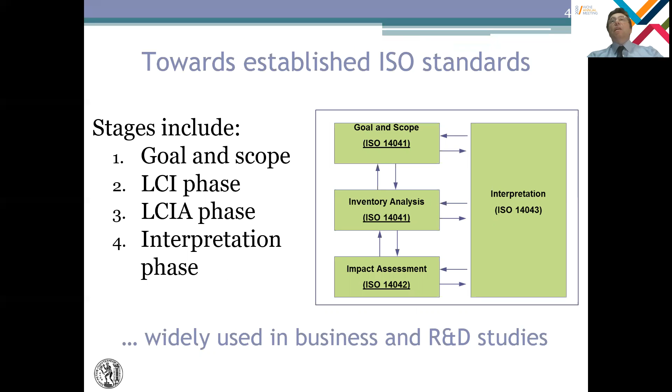Now, LCA is running for almost 30 years, and has been produced not within chemical engineering, but chemical engineering definitely has quickly embraced LCA and now it is part of our routine calculations for designs and case studies. It is essentially an ISO that has four rigid and clearly defined stages that include the goals, the description of the boundaries, the calculation of the inventories, and the development of analytics.

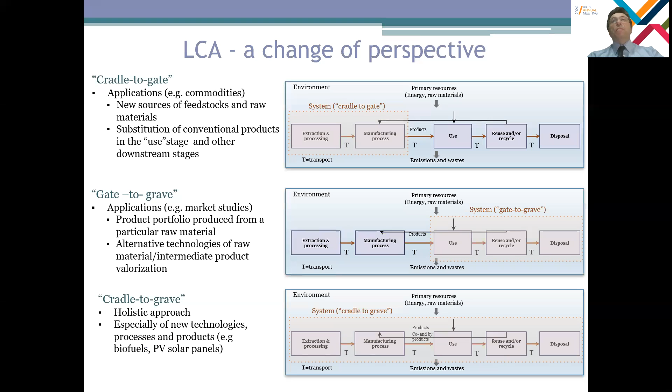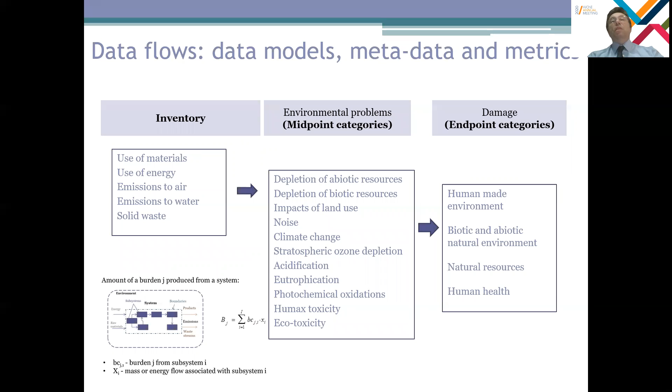LCA has definitely also expanded our perspective, from the previous esoteric analysis of the process into one that considers both upstream and downstream process, what we would consider a holistic approach. Also, LCA is involving a lot of data: background data with respect to the products, the process, the reactions; foreground data, which relate our decisions to ways to implement our idea into a process; and output data, which is the performance related data, all the different type of metrics, midpoint, endpoint categories, and so on.

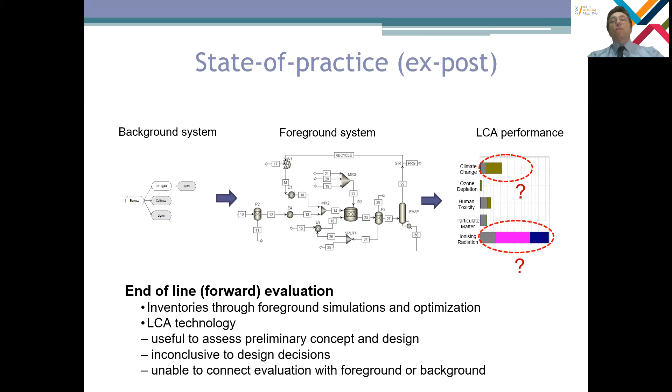So what we have today, the ex-post type of LCA, is data flows that are shown here from the left to the right, which include the background data that are converted to foreground data and then eventually give rise to life cycle inventories and life cycle analytics. Again, we want to get quickly through the foreground kind of evaluations and much more to make use of our degrees of freedom to get to better LCA performance, not just wonder how we're gonna improve things that we have produced.

So what we need is support as to the overall development of the background data, so the means, in other words, to go through the foreground calculations quickly and also make good use of the degrees of freedom so that we get to better results. So what we need is actually advice at early stages of development, so advice in advance. So advance is exactly what Ex-Ante stands for, but in advance for what?

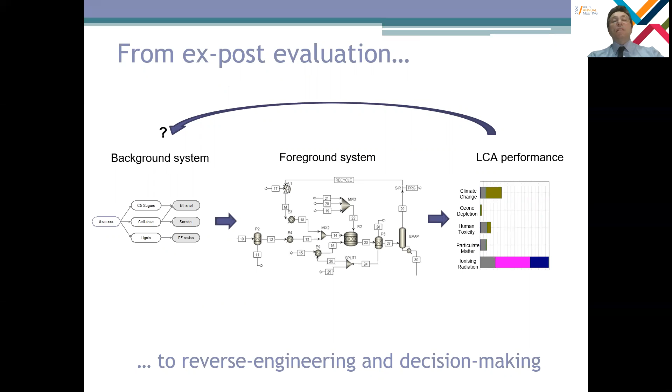So going back to the data structures, for the ex-post calculations, what we need to know is means to possibly change our flowchart with better processes, with better means to integrate, with different alternative supplies, if you wish, even to change our initial idea into an alternative idea. So the ex-ante promise has to be able to exclude technologies ahead of design, build functions that identify good supplies from bad supplies, and means to target appropriate products and product portfolios early on.

So from a viewpoint of data flows that we started from, again, input comes from the background data, the output is the LCI, and the foreground is the in-between stages, if you use the system that translates the input from the left to output on the right. And this system takes time to deliver, and this system could be parameterized to deliver with respect to the degrees of freedom which are available for us to manipulate.

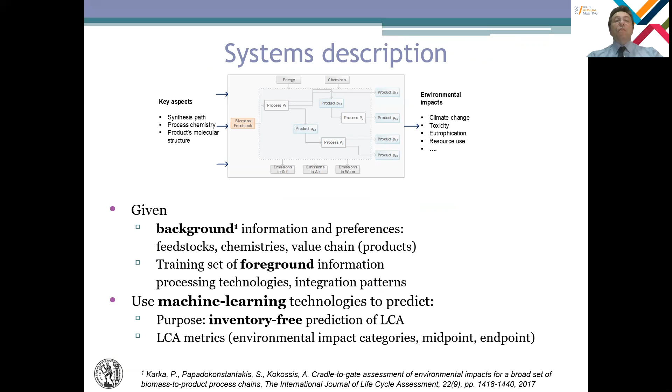So the basic idea is to use foreground data in order to develop a data model that could replace or convert the conventional connection between input and output from the flowcharts that we conventionally use through a data model that could be in the form of a decision tree or an artificial neural network. And apparently we will use machine learning in order to develop these models. So from a systems perspective, what we are given is data sets of background and foreground data, a set of KPIs, and we want to develop an inventory-free model using machine learning technology.

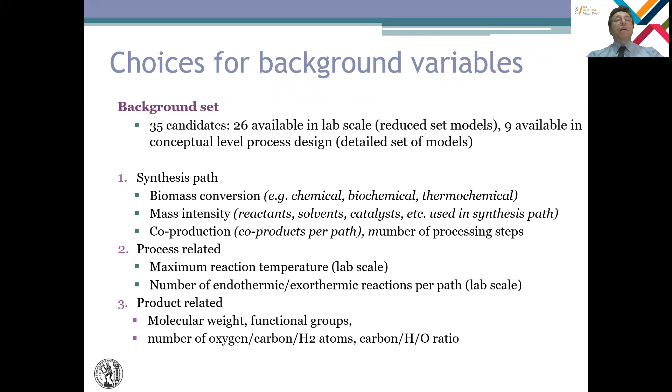I will start with the presentation of the input-output-based data structure that includes choices for background data that relate to reaction paths and chemicals, products, product portfolios, and different types of processes. We have sets of data that for each product will originate alternative supplies. So in this case, from glucose, we have supplies from wood chips or wheat straw, and many more. We have sets of data for each supply to address options to produce different products. So in this case, from biomass, we produce methanol, ammonia, ethanol, and many more.

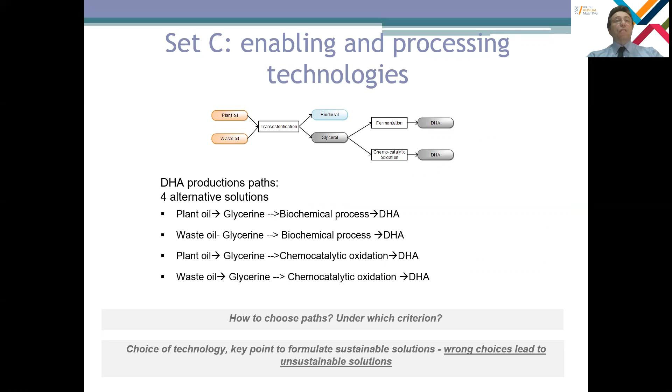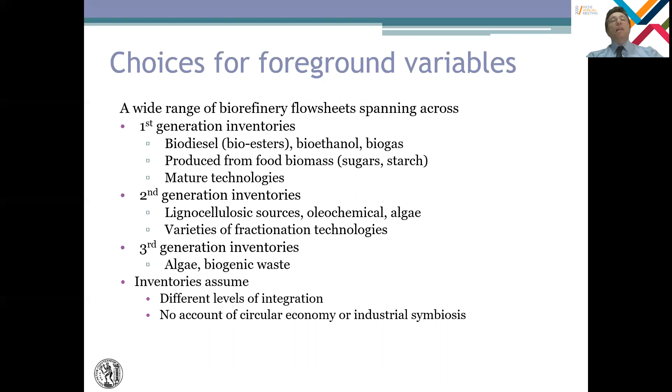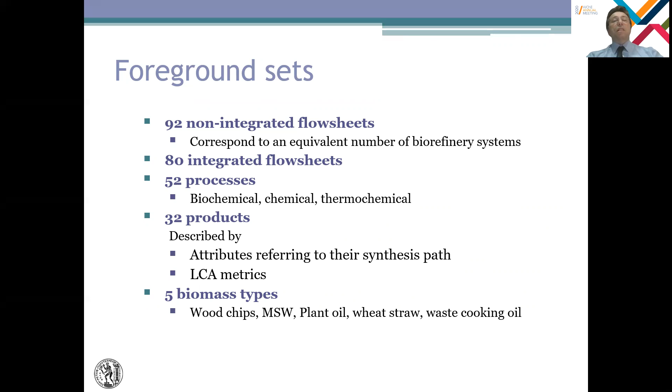And we have another set of data to connect supplies and products to different technologies through, in this example, biochemical or thermochemical routes. And the choices for foreground variables include all different types of generations, first, second, third, fourth generation biorefineries, from more mature technologies like biodiesel, bioethanol, biogas production, down to more emerging ones like the algal biorefineries and waste biorefineries. In terms of numbers, the foreground sets that we have used in this study include 92 non-integrated flowsheets and 80 integrated flowsheets, overall 52 processes, 32 products, and 5 different types of biomass.

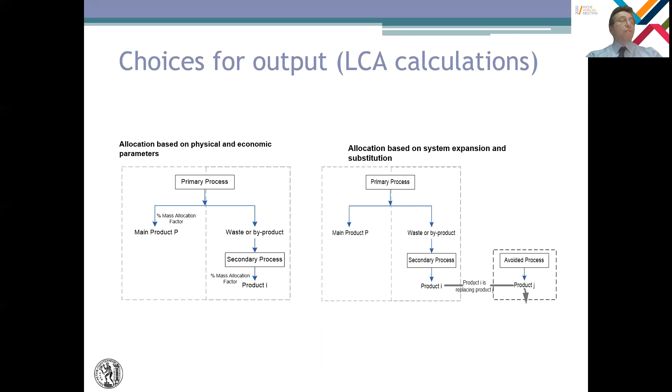Multiplying all these, we have 3 different options for calculating the allocation, either based on physical and economic parameters or based on system expansion and substitution. Overall, the output of the system accounts for 138 different KPIs, which include the 23 LCA metrics, namely the midpoint impact categories, the endpoint damage categories, 2 different total score metrics, and all this multiplied by the 3 allocation methods that I explained before, and 2 sets of independent variables for fully reduced kind of systems.

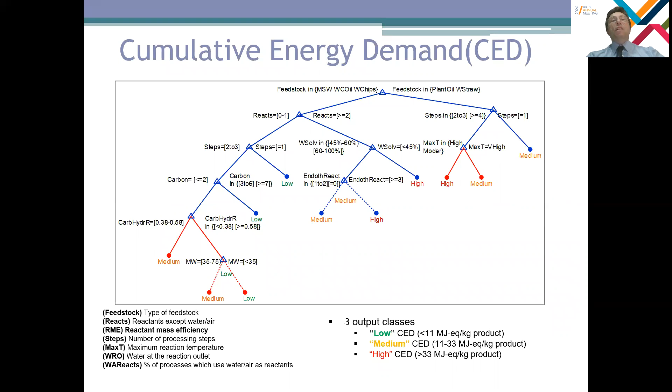We have verified the joint importance of both process-related and product-related functions in the models. Examples of trees are shown here with respect to climate change, with respect to CED, the cumulative energy demand, with respect to human health. And again, these kinds of trees are developed for all these different indicators that I explained before. And as far as the artificial neural networks are concerned, they generally worked well for the majority of the metrics. Still, for some of the indicators, the performance has not been the best, and there is room to improve this part in the future.

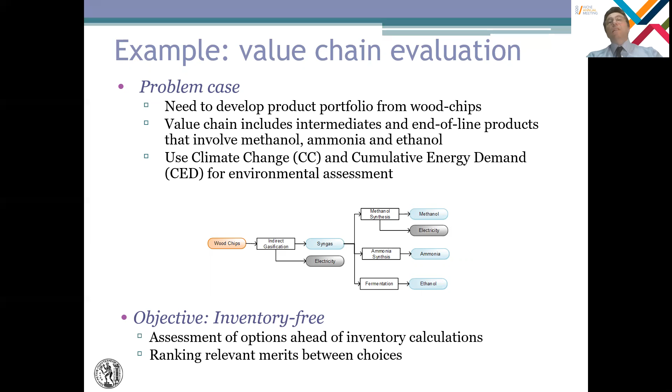We have two different metrics, the climate change and the cumulative energy demand. We have wood chips as the raw material. So again, the idea is which one of these products is better, and all that, without the need to do any simulations. So to do that for each product, for each feedstock, for each technology, we need to rely on the decision tree. We pick up the numbers there, and then the results are summarized in the tables.

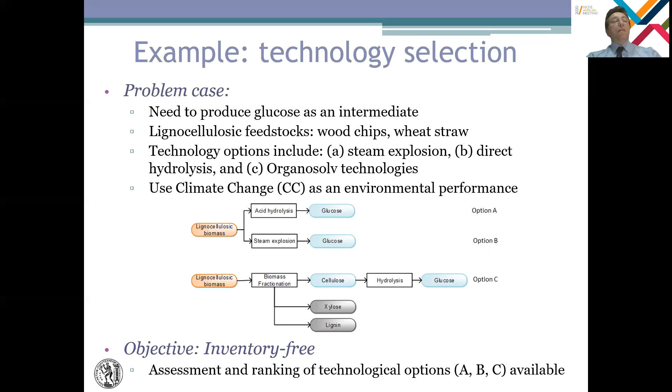In the second example, the purpose is to identify the right technology to convert lignocellulosic biomass into glucose. Options include steam explosion, direct hydrolysis, and organosolv technologies. We pick climate change as the metric to choose. Again, decision trees. Again, for each feedstock, product, technology, we have to apply the tree.

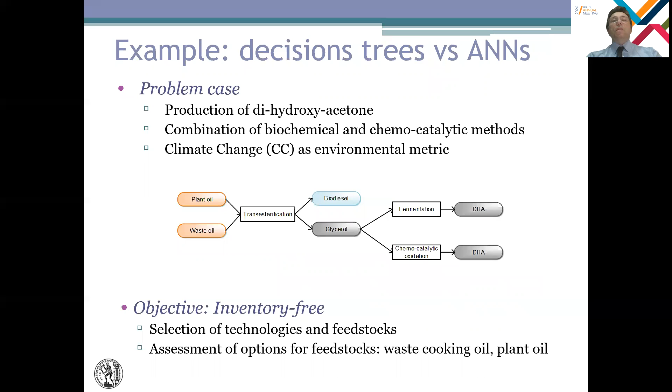In the third example, again, we address technologies for a non-conventional product, dihydroxyacetone, that comes from plant oil or waste oil. We use climate change again as an environmental metric, and essentially we have to evaluate ahead of design calculations four different paths, these paths that we show here.

Now, if one uses artificial neural networks on top of that, we'll be able to identify the single better solution, the last solution, as the greener one, and definitely pick up the right one. So a combined use of artificial neural networks with decision trees is what will give you the better result in this case.

Now, although the work is at very early stages, the results are not so bad, I would say, and more data will make the models more reliable, especially with the joint use of decision trees and artificial networks, to double check for consistency.

This kind of work has actually whetted our appetite. We have already extended the application into consumer products, believe it or not. This is joint work with Whirlpool and an Italian group. So what we target now is electrical appliances. Yes, it's a different problem. And we want to identify the better materials to use.

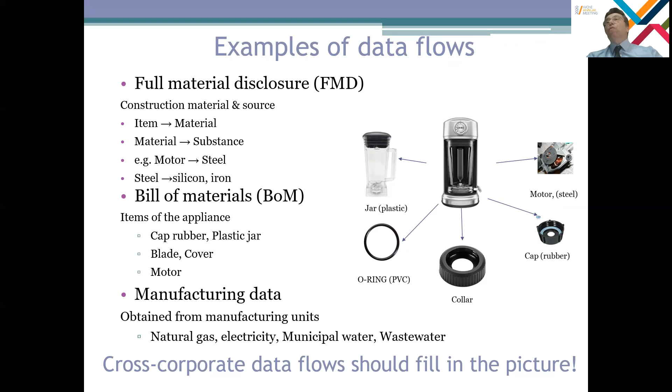So instead of flow sheets, here we have bill of materials, full material disclosures, and LCA calculations as before. At the end of the day, we also have foreground, background data and LCI metrics. So the idea is applied in a very similar way. Again, background data will be the FMD, and the bill of materials will be the foreground data. And again, the output will be the LCA performance.

The ex-ante approach appears to be getting a lot of useful help from machine learning, and we continue along these lines. Unfortunately, time is running out and we cannot show more results for this other application, but probably in the next presentation we'll be able to do that.